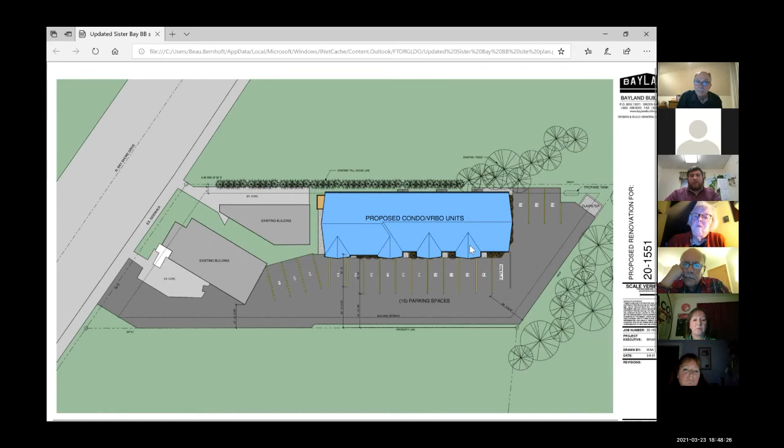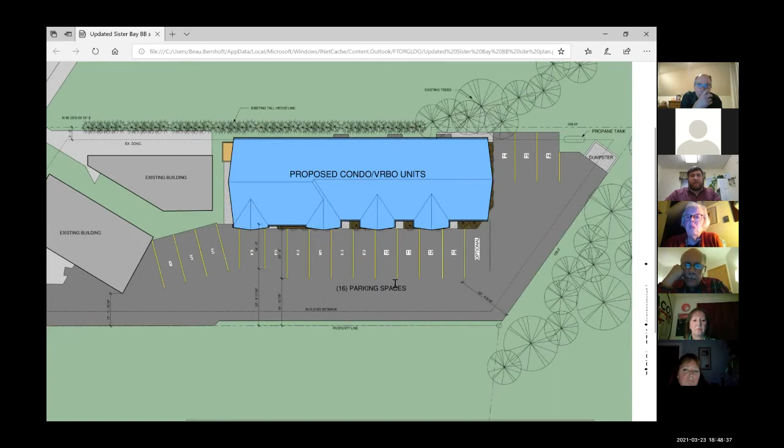Okay, so if you can see this, this has been a last minute discussion that I've had with the developer on changes that we needed to make. And first I wanted to address the parking. There are 3 garage stalls in here, so there are 3 spaces accounted for inside the building. And if I zoom in here, you can see the count of 16 spaces. On the previous reviewed set of plans, there was only 15 depicted, so I asked the developer to go back and make sure there was a total of 16 spaces on the exterior. The developer did get this back to me at 11:30 today. It shows an 18-foot parking space here in front of the garage.

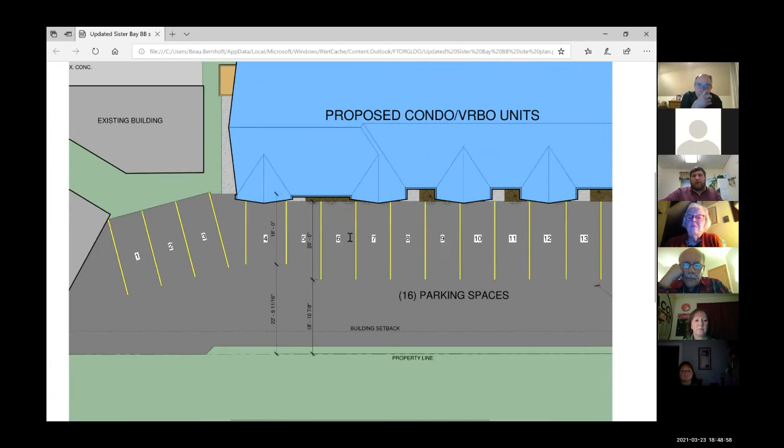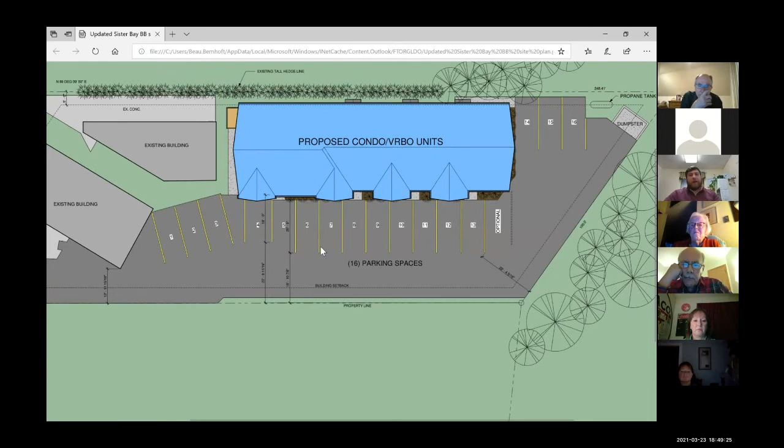And this does not meet the 9x20, but I think that could be addressed. And then the other discussion I had was the apron of the parking stalls. With a 9x20 space, which is what the village requires, there's only about an 18-foot 11-inch gap, which is the aisle between the spaces and the backing up area. And if you look, the requirements in the zoning code show a 22-foot space for aisles when it's a 90-degree parking stall at a 9x20 size. So that's another thing that needs to be addressed.

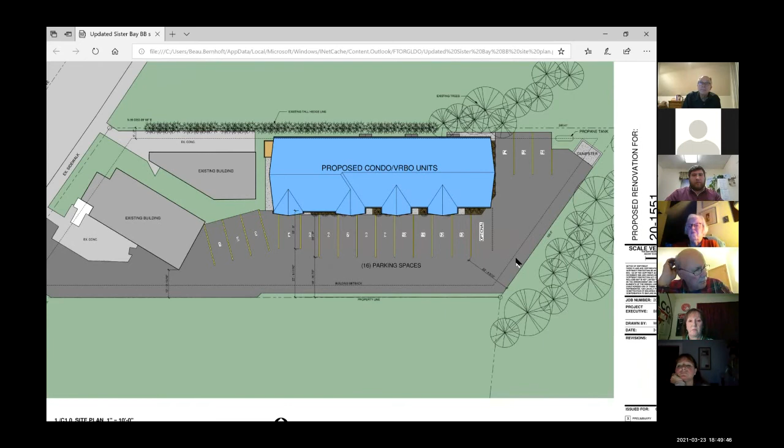The other question also that I had, Beau, if you want to go to the 3 parking spaces by the dumpster.

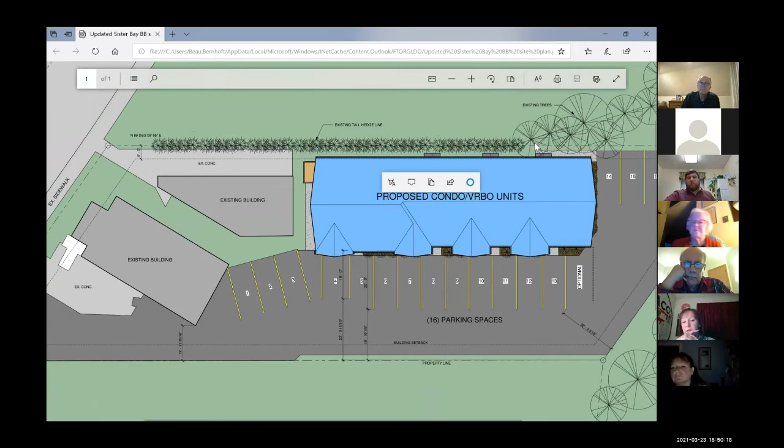There's no calculation here to know if there's a 22-foot aisle for those 3 parking spaces. There may be, there may not be, but the plan simply does not depict it. And I'm still looking for a calculation on the green space.

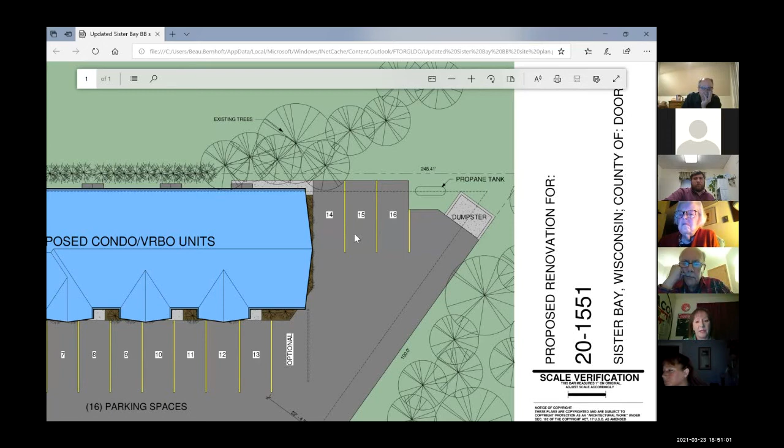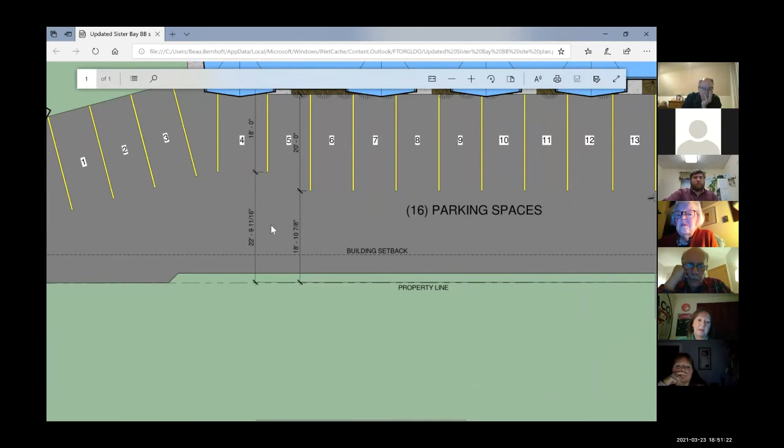Can you scroll to the property line at the bottom and blow that up a little bit? The aisle that they are currently measuring, the 18 feet, 10 and 7/8 inches, is going all the way to the property line. That cannot be. It has to be on the paved section. So I'm presuming that if that building setback is 6 feet, that green area might be 2 feet, which shrinks that aisle down to 16 foot 11.

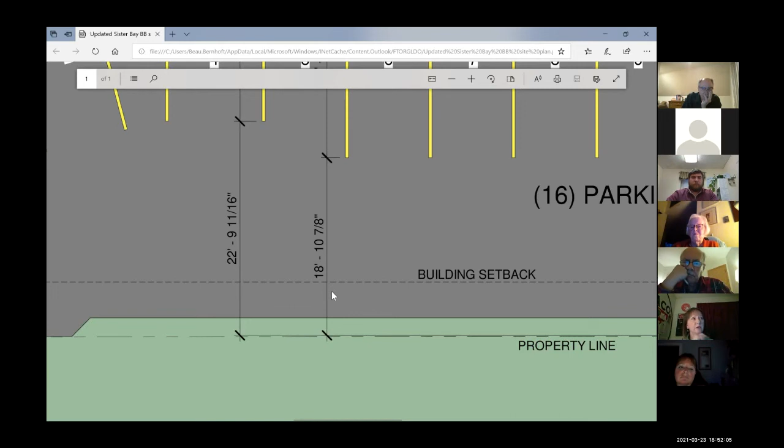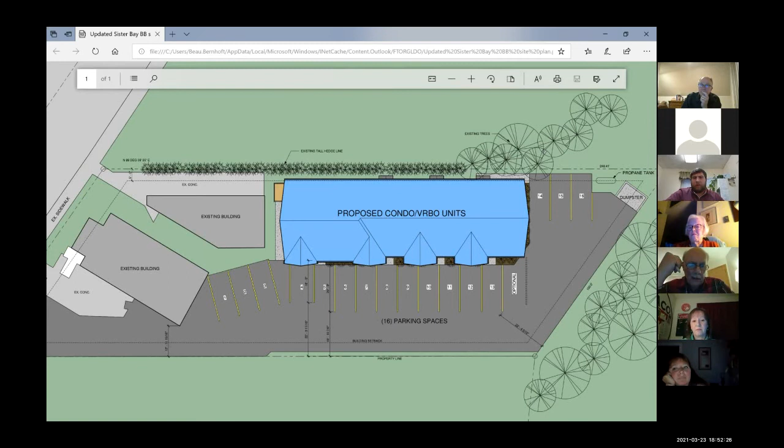I do have, is everything going to be repaved, or is the existing pavement going to be saved? I'm not seeing, who's here to answer that? I don't know if Gary's on, or Steve, if any of you can unmute yourself to answer these questions.

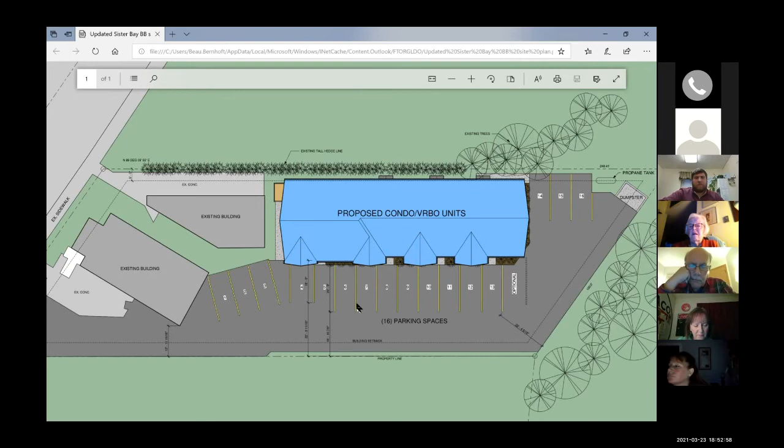Beau, can you hear me now? I can hear you. Okay, so I can address some of these. That area down on the south property line, that will all be paved right to the property line. The designer just showed the existing green space there. Denise, to answer your question, it does have the green space calculation on this page. We're at 85% impervious surface and 15% green space. I believe 10% was the number we had to meet.

Okay, well, so new pavement. I'm sorry to tell you this, Gary, but you cannot pave to the property line. You're not supposed to pave within a 5-foot setback or the 6-foot setback. So the current paving on the west side of the property is to the property line, and that's actually technically an easement there.

What's been there for a long time, how that was done, when it was done, when there were code changes or whatever, I don't know. That parking lot's been there for a long time. These buildings have been there for quite some time. But if the code has changed and you're doing something new, it's a change of use. The plan commission cannot allow you to do something that was there before that is now not code compliant. And with that amount of asphalt, you need - because it's one of the reasons why that's in the code - is because you cannot have all of your water running to the property line, possibly affecting the neighbor. That's one of the reasons why it's in there.

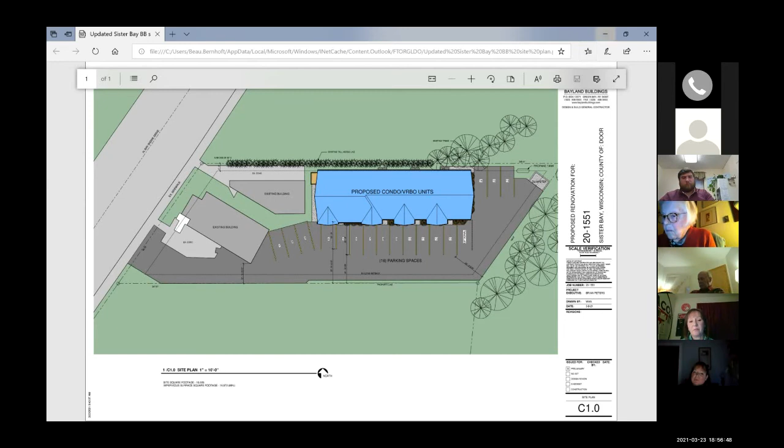The problem being that the use itself is not a grandfathered use. So if something happened to the parking lot - I think Beau can explain it better, I'm kind of muddling the words. I think what you're trying to say, Mary Kay, is at some point in time, the parking is going to have to be repaved. Exactly. And whatever time that is, if that's 5 years, 10 years, 20 years down the road, now the Plan Commission has allowed a project in that kept the current parking lot, but whenever it is done, it is going to severely impact the size of the parking spaces, the aisle, and then it becomes even more non-compliant, correct?

That is what I'm trying to state, but even with the modifications, you and Beau are both stating that they don't meet the existing regulations for parking. So you've got multiple problems all over the place. Right, they're one parking space short now. There's not the 22-foot aisle. The dumpster is in the setback, and they're still showing a 5-foot setback yard abutting Al Johnson's, which has to be 6 feet.

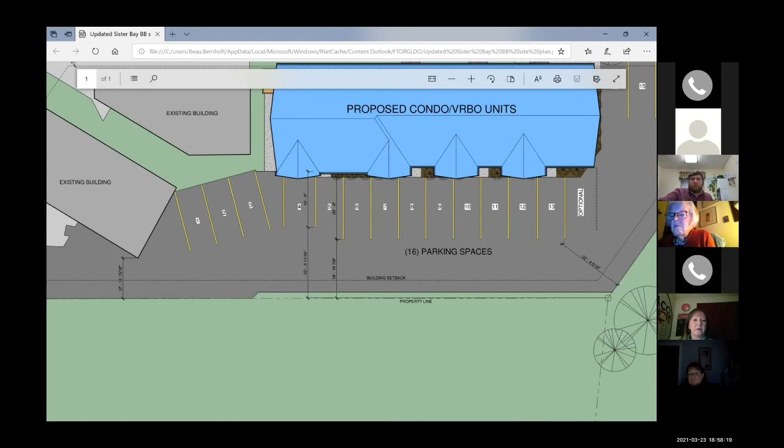Yeah, the 5 foot, that's a mistake on the plan. The building was designed with a 6-foot setback. They must have not changed the 5 foot number over there on the upper left-hand corner.

I did have a conversation with the developer about that 5-foot setback, and I did see an earlier set of plans with 6-foot revised on that. But when he came back with the new parking plan, it looks like it went back to the 5-foot setback. There was the original designer that we had left Bayland, and we had to work with a different designer, and he must have brought up an old plan with that 5-foot setback on there. But this plan was designed with a 6-foot setback. That 5 foot is incorrect.

But what was the overhang question? Right, I'm sorry, go ahead. The overhang, Beau, cannot be in that setback also, which it is. The overhang cannot be in that setback without, in the B3 district, they would need to get approval from the neighboring properties to cross that setback minimum. Right, and that overhang was 6 feet from the property line. So that should not be an issue.

I guess I have a question on the concern on the dumpster area. What was that concern there, that it didn't meet? That it's in the side, it's in the setback. It cannot be in the setback. So that has to be in your building footprint. If you can see on your building setbacks, the dumpster has to be located within that building setback.

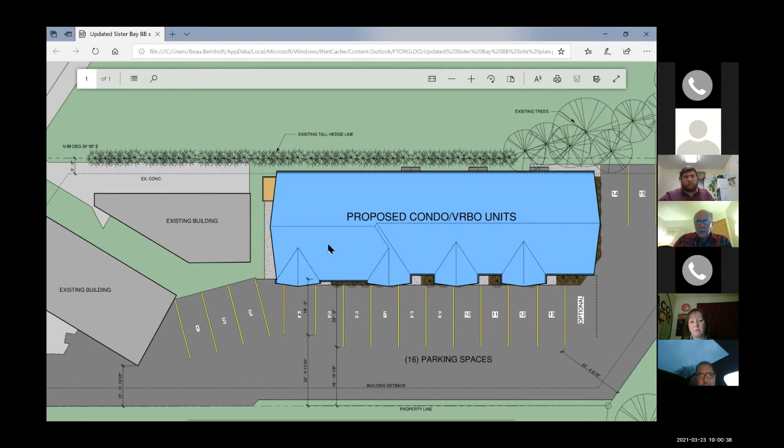Beau, are we talking about the right side of the dumpster? Because that dumpster can be slid to the left. Sorry, I heard someone ask a question before as well. Can I? Yeah, sorry, Beau, can you just slide the picture over so we can see the dumpster area? Thank you. Sorry about that. No worries.

Yeah, I mean, so Denise, when you say dumpster, what do you mean specifically? What does the code say? Let me look that up. It can't be outside of the setbacks, and right now everything is showing outside of the setbacks. So I think that different plans have to be brought back that literally show exact measurements and everything within the setbacks. Right, I know, because even the parking spaces 14, 15, and 16 are-

Oh, within the setback, yeah, I agree. That needs to be on there. No, I just mean really what that should be reflecting is the pad that the dumpsters go on. So what I'm wondering is, specifically, what is it? Is it the pad? Is it the dumpsters? Is it the enclosure for the dumpsters? I don't think that the village actually has any code for an enclosure for dumpsters, but we do. Oh yes, we do. Oh, it's just grandfathered for everyone. Must be.

And if you just want to let them know too later, I don't mean to hold the meeting up, it's just the specifics of it. And also parking spots 14, 15, and 16 are the 20-foot depth, it's just not depicted on the plan there. But those lines, if you measured them, are the same length as all the other parking spots. Yeah, you're right, but you also have it in the setback. They can't be in the setback.

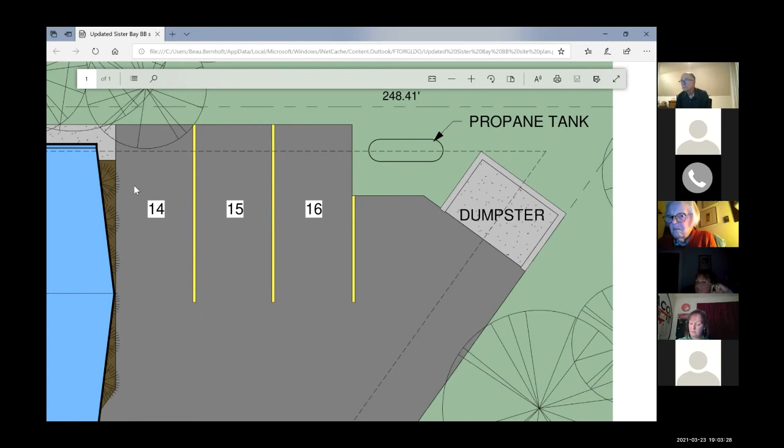So I'll get those plans and look at them. I would have to go back and ask Beau and look at the minutes, but I think you went from commercial use to commercial use. Here you're going from office and commercial use to transient lodging, and that's a change. Yes, that's correct. Well, why was Quinn's property commercial use for transient? I wasn't there for that. Well, it was just brought up in the meeting two weeks ago, the special meeting. I would have to refer to someone who was there to answer that.

I think I'm just looking for revised plans to go through and approve this, where everything is within the setbacks, and you can see it's 6 feet, not 5 feet, and that the parking stalls are the correct length. It seems simple enough.

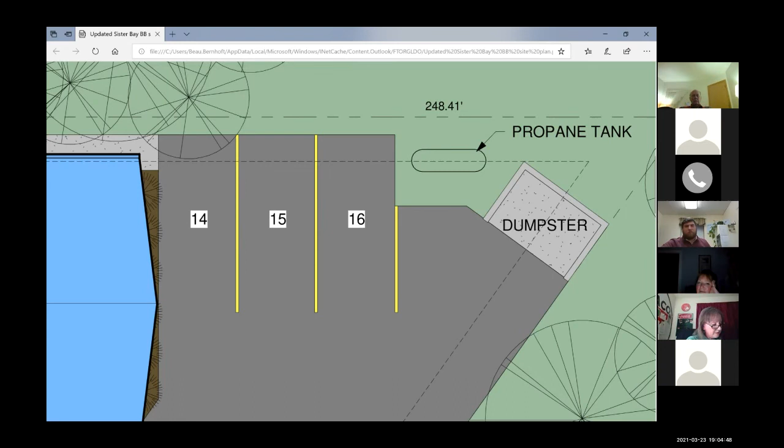Would you like to make a motion to table it until next month with new plans addressing what was brought up tonight? I don't see any alternative. I'll make a motion to table. Motion, second by Shumway. Was that Gretzmacher? It was. Second by Gretzmacher. All those in favor respond with an aye.

Aye. There'll be some discussion for the minutes, so we can actually get a list in this table. Can you give me a list of what you want? Because I'll include that in the motion.

Well, everything needs to be within the setbacks. Yeah, we talked about the dumpster. Hold on a second, to be within the setbacks delineated in the zoning code? Yes. Okay. Then what? The aisle has to be 22 feet. Parking lot aisle must be 22 feet wide. Okay.

What about the dumpster? That would be addressed in that everything needs to be in the setback. That was the building side setback and the dumpster enclosure setbacks. Okay, so what is it? I'm sorry, the building side setbacks and the dumpster enclosure.

So can you help us find exactly where it is in the zoning code, just so we can read it? Yeah, Britt, I can give you a call tomorrow. We can go through the code.